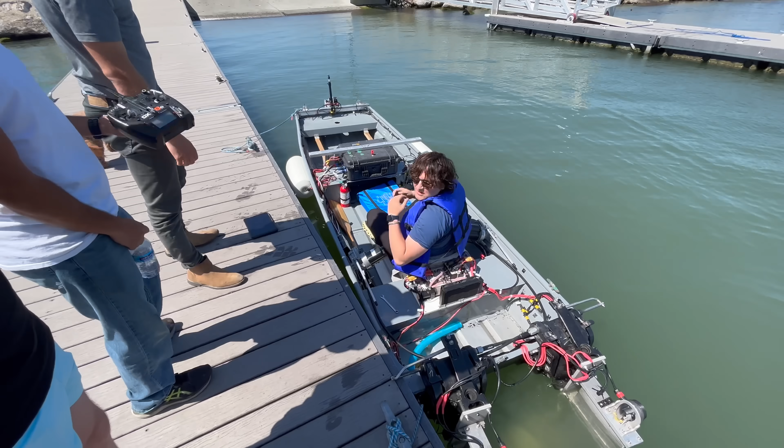Riding on the N30 was awesome, but I had even more fun riding on their little hydrofoil John boat. This thing served as a small-scale test platform that they used to develop their flight control system before moving up to the N30. It just so happened to use the exact same electric motors and ESCs that I used on my 13-foot Boston Whaler, so it was cool to see what kind of performance I could have gotten if my boat had hydrofoils, and weighed a lot less.

After riding this thing around, I knew I wanted to build a manned hydrofoil craft of my own. I didn't quite have room in my workshop for a John boat-sized build, so I decided to instead base mine off an 11-foot stand-up paddleboard. Eventually the design came to basically just be an extra large e-foil board, but one that you sit on instead of stand, because I want it to be self-stabilizing, not human stabilized like most other e-foil boards out there.

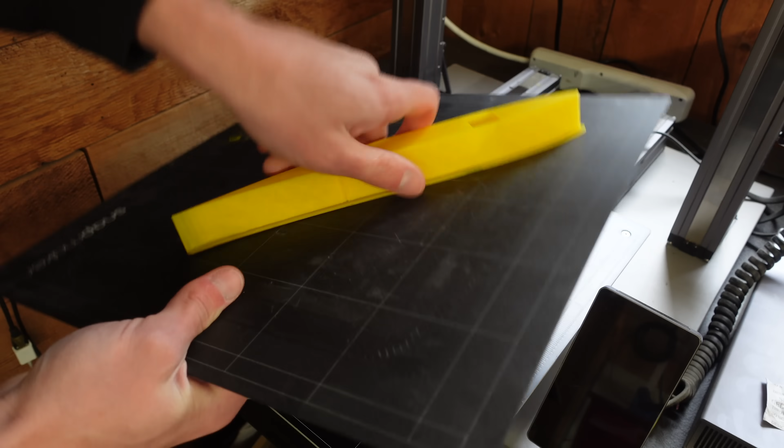For this I would use the exact same dRehmFlight code that I had used on my smaller scale test platform. I actually started this project several years ago by experimenting with 3D printed hinge designs in airfoil profiles. They turned out to work really well and were super easy to produce, so this is what made me end up wanting to 3D print the entire wing and horizontal stabilizer.

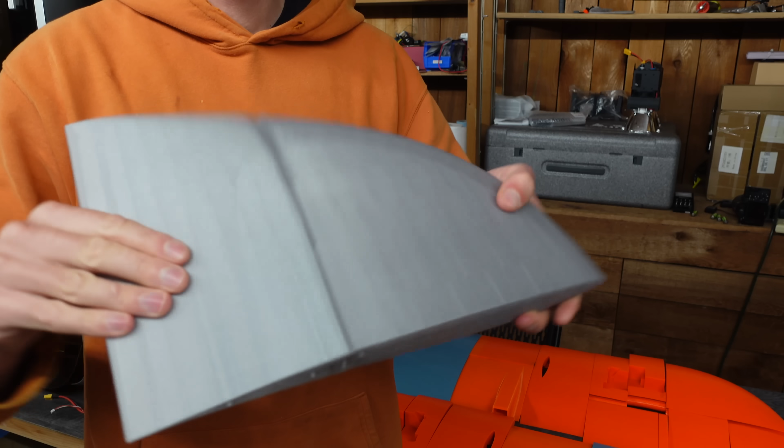3D printing also made it super easy to add all the little things, like servo mounting spots, wire channels, spar channels, attachment points for the tail booms, and so on.

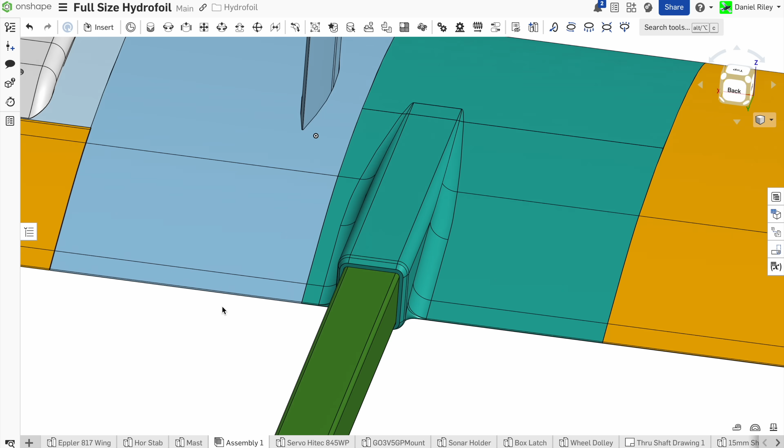The main foil has 2 ailerons, 2 big waterproof servos to control them, 2 extruded aluminum masts that connect to the paddleboard, and 2 attachment points for the tail booms, or fuselages as they're called in the foil world.

If we split it in half, we can see there are slots for an aluminum main spar and another aluminum alignment rod back here. In the back we have the horizontal stabilizer. It's held to the main wing with these 2 square 30mm carbon fiber booms. It has 2 elevator sections, each with its own servo.

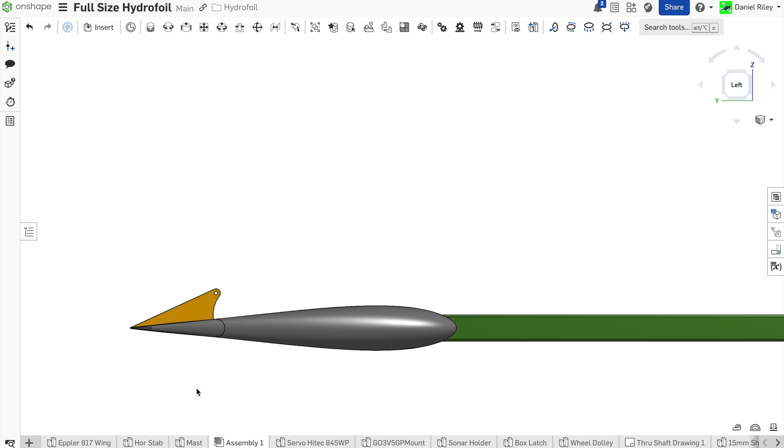The whole thing is a symmetrical airfoil that gets really fat around the big servos to keep it as streamlined as possible. The servos were too thick to entirely embed in the main wing as well, so to streamline those and reduce drag I just made separate servo covers for them.

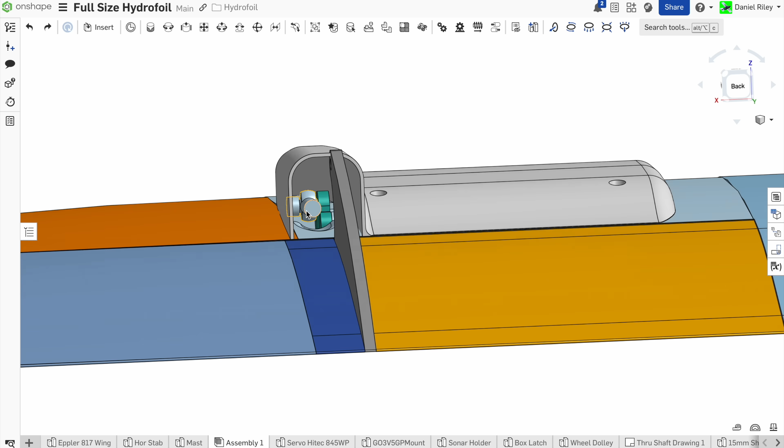The push rods and control horns are going to be similar to any old RC plane, just beefier. They stick out quite a bit and are definitely not the most hydrodynamic things in the world, but this is going to be a slow hydrofoil. Hopefully slow like my prototype was. Probably not that slow, but still hopefully pretty slow. I'm wanting it to be like the bush plane of the hydrofoil world.

At slow speeds, having draggy control horns isn't as much of an issue. If we were aiming for higher speeds, I would definitely want to find a way to make the control linkages more streamlined, but it shouldn't matter as much on this build.

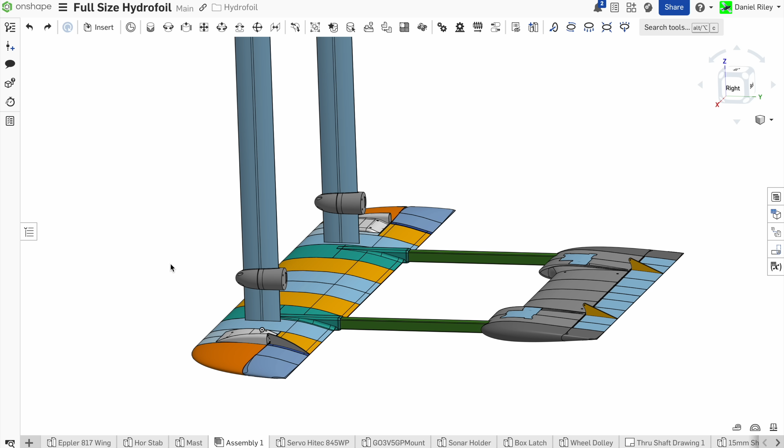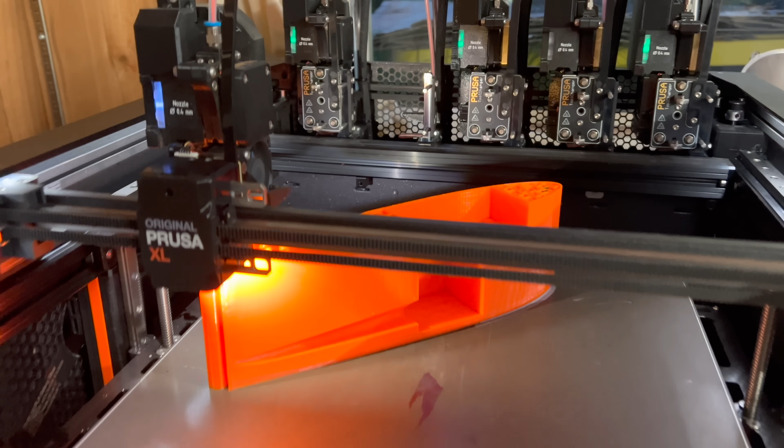If this wing was solely 3D printed, it would obviously just break since it'll be carrying probably over 200 pounds. So to help with the forces, I had the mast connected to some 1/4-inch aluminum plate that I had cut by PCBWay. The plate is welded to a square aluminum spar that runs through the length of each wing.

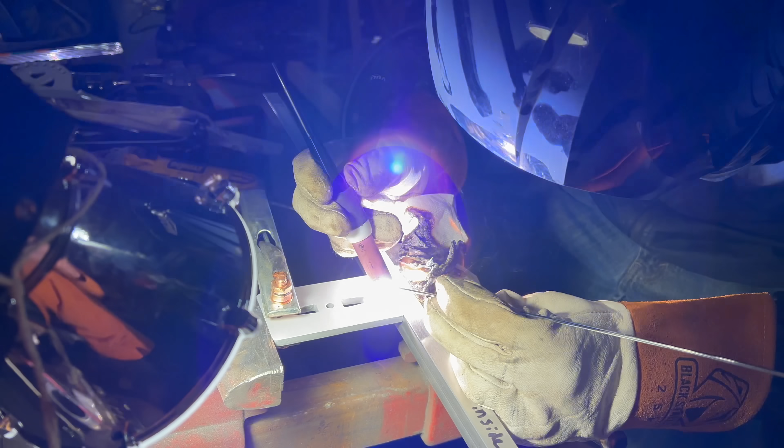If I were redoing this project, I would definitely change the way the spar and mast connector works, but for now this is the way it is. I got my roommate Ethan to TIG weld the spar to the mast connector plate. That worked pretty well, but I did have to hammer the spars back straight because they did warp quite a bit.

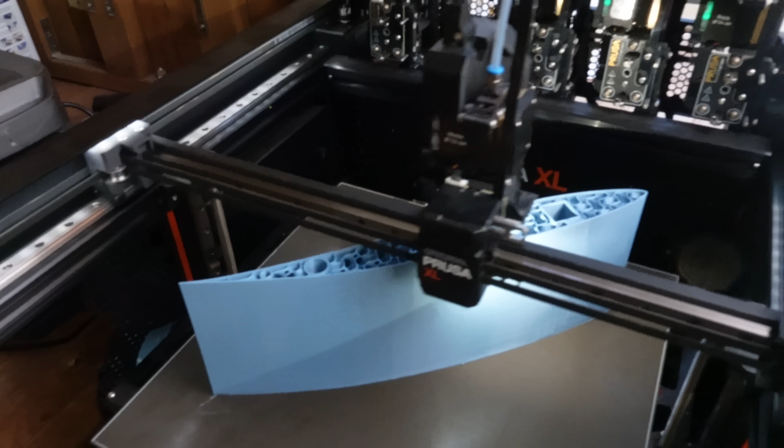Next up, it was time for a crap load of 3D printing. I printed pretty much this entire thing on the Prusa XL out of PETG. For a lot of the complex inner geometries, I used the multi-extruder capabilities to print PLA as the support material. It doesn't stick to PETG, so this makes removing the supports easy.

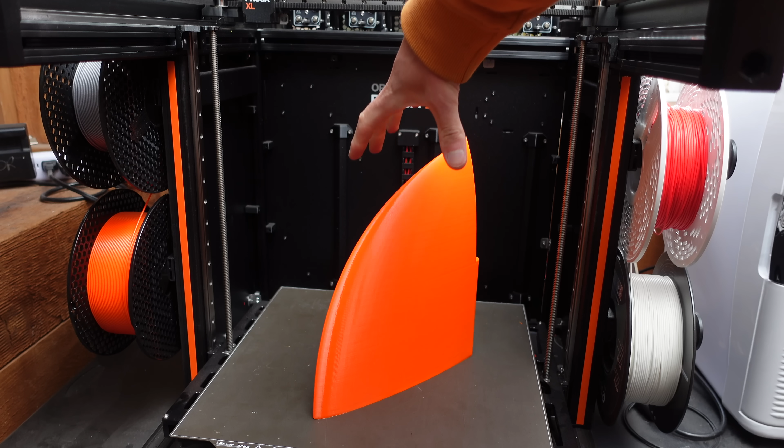Now most hydrofoils are made of carbon fiber because it's super stiff and can be made to have a super smooth surface finish. 3D prints are neither of those things, so my plan was to add a layer of fiberglass over the wing after it was all assembled. This would be fairly easy to do on the wing, but I obviously wouldn't be able to get fiberglass into the 3D printed hinges, so I was just going to leave that as raw plastic.

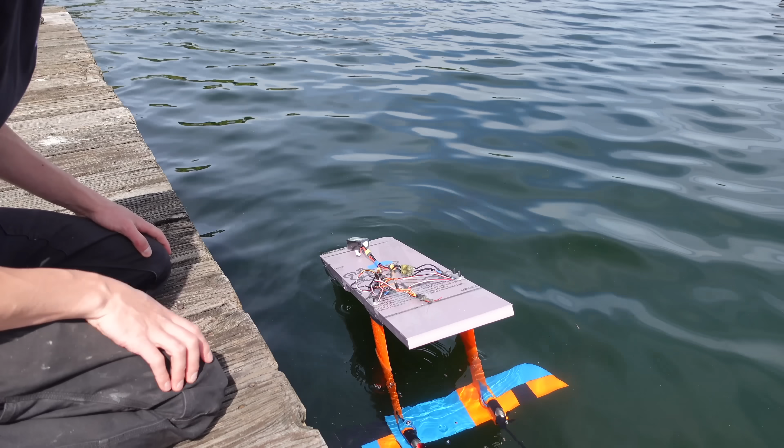I used a gyroid infill for the whole thing, and this was for a very specific reason. I initially wanted to keep each wing section airtight so that they would have some buoyancy. This would make the vessel pretty unstable while at a standstill, but while moving, the buoyancy in the foil would hopefully reduce the stall speed quite a bit. Having buoyancy in the foil was one of the reasons why this smaller version was able to go so slowly.

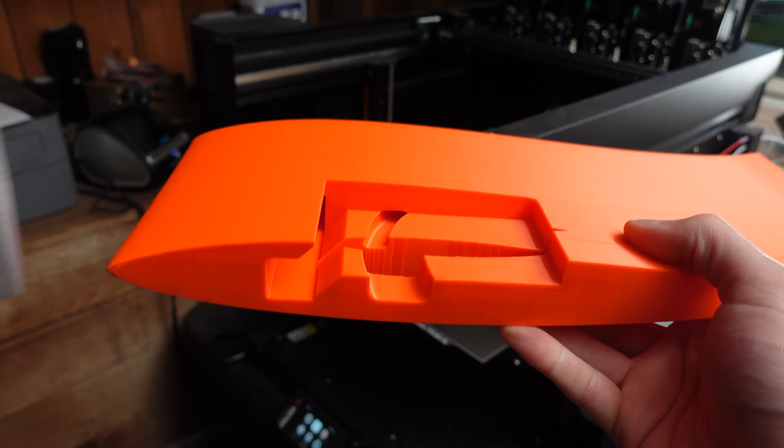So airtight prints was the hope, and I had pretty good luck achieving this on the Prusa XL in the past. But I also realized that most of the time FDM prints are not airtight. Fiberglassing over the surface would have fixed this, but I wasn't going to be able to fiberglass over the hinge portion, so they were still vulnerable to potentially leaking.

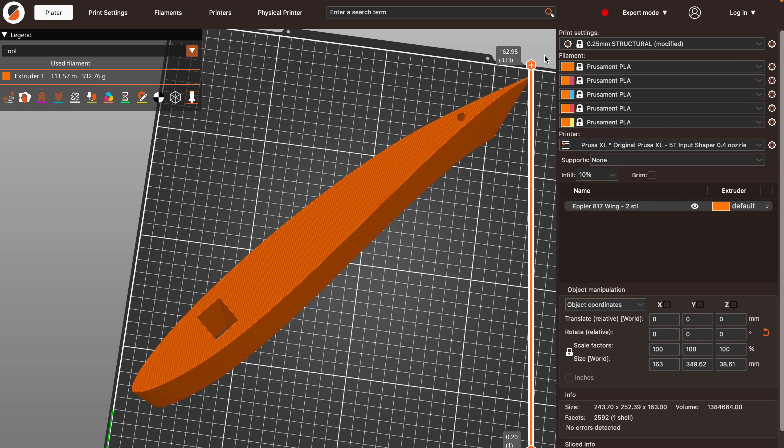If I were to have used one of the normal infill patterns, there would have been a good chance that individual cells filled up with water, and in this case it would be a total pain in the ass to get all the water out. I chose the gyroid infill because it makes the entire inside of the 3D print one continuous volume. This way, if a wing segment leaks, I can drill a little hole in it and the water will flow out when I bring the hydrofoil out of the lake.

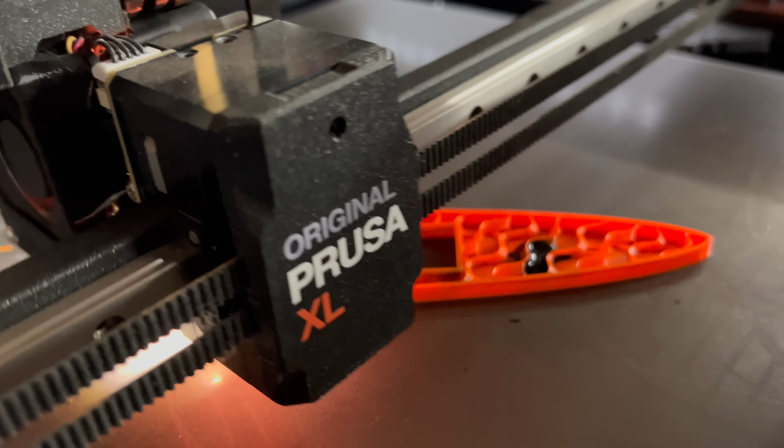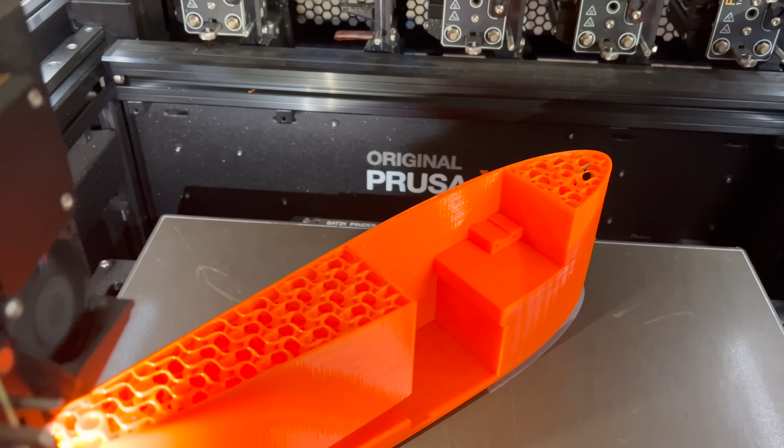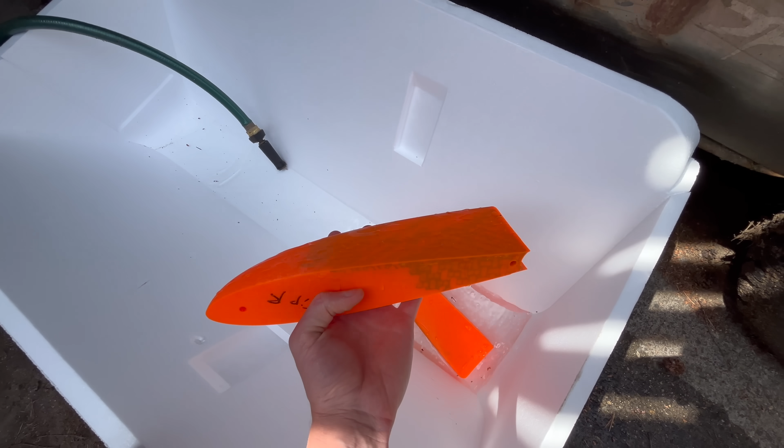I even decided it would be a good idea to put drops of black food coloring into the prints, so if the wing segments did fill up with water, I would more easily be able to tell, with the help of some backlight. This ended up being a huge mess, but for now the prints seem to be turning out pretty good. I did test some of the sections, and at first they seemed airtight, but after holding them underwater for several hours, the food coloring made it obvious that they did leak.

So this kind of ruined my dreams of a buoyant foil, but at least now it won't capsize when it's not moving. So after weeks of printing, I got all the pieces made, so it was almost time to start the assembly. But first, let's talk about the servos. These are the actuators that move the ailerons and elevator, so I can control the hydrofoil.

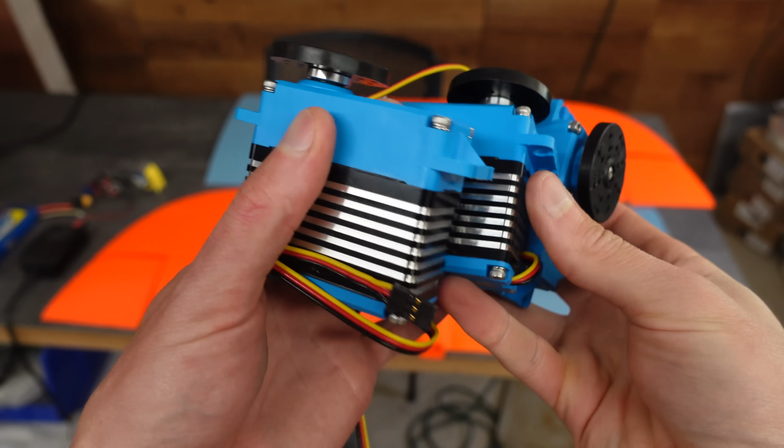I chose to use these giant high-tech D845WP servos. They have an IP67 rating, which means they are protected against short periods of immersion in water while under pressure between 15 centimeters and 1 meter. On the hydrofoils, they aren't going to be any deeper than a meter, but I was a bit sketched out by the short periods part.

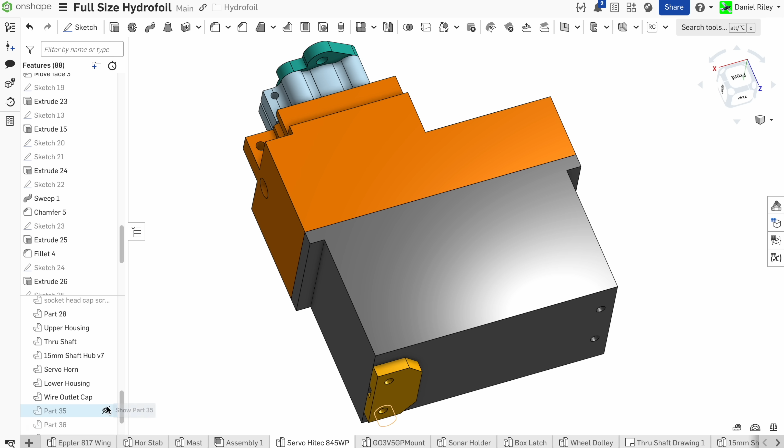So while they could have held up to water ingress on their own, I decided to play it safe and design an additional layer of protection. Here's what I came up with. There's an aluminum shaft that transfers the rotational movement from the servo spline out to the servo horn, and 2 resin-printed enclosure halves that seal the servo in. The aluminum shaft goes through the enclosure with a bearing here and 2 O-rings here to hopefully keep out water.

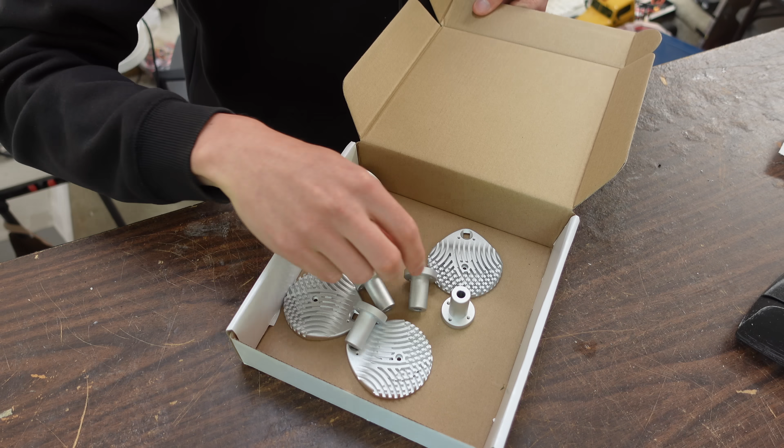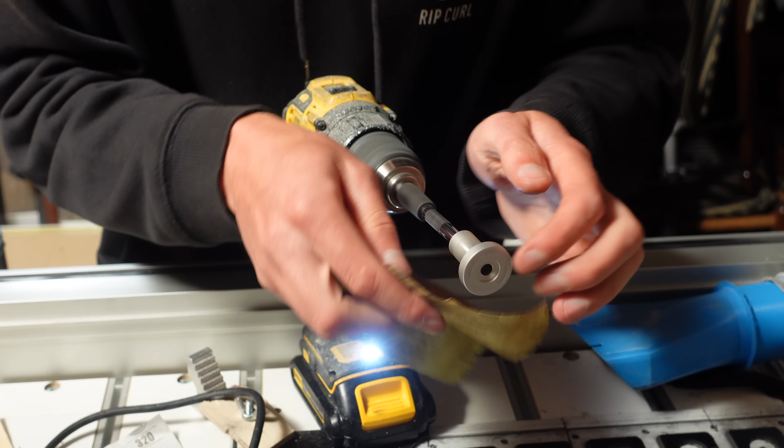I got the aluminum shafts CNC machined by PCBWay as well, and they came with a sandblasted surface finish. I wanted the area that goes through the O-rings to be smooth, so I threw them in my lathe and polished them with increasingly finer and finer sandpaper until they were, well, not perfect, but definitely smoother than before. Those got screwed onto the servo hubs, which then got attached to the splines. I SLA printed the housing shells out of clear resin on the Formlabs Form 4, and tapped some holes in them.

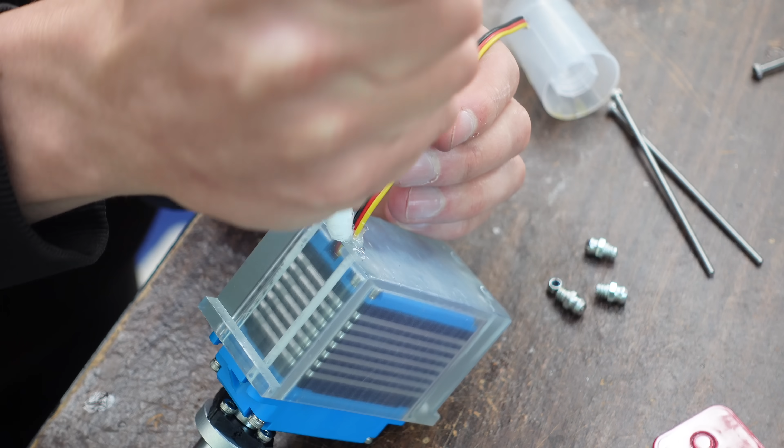You'll see why in a bit. The servos just fit right in there, and the wire pass-through hole gets silicone squirted around it, and then sandwiched in place by a little plate with a groove.

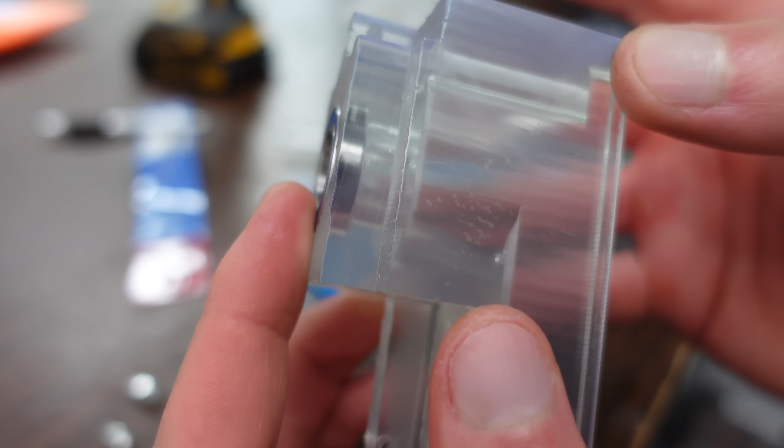Next, I lubed up the shaft with some silicone grease. I chose silicone grease so that it wouldn't degrade the O-rings or any of the other plastics. I popped a bearing into the upper part of the housing and put some grease behind that, and then put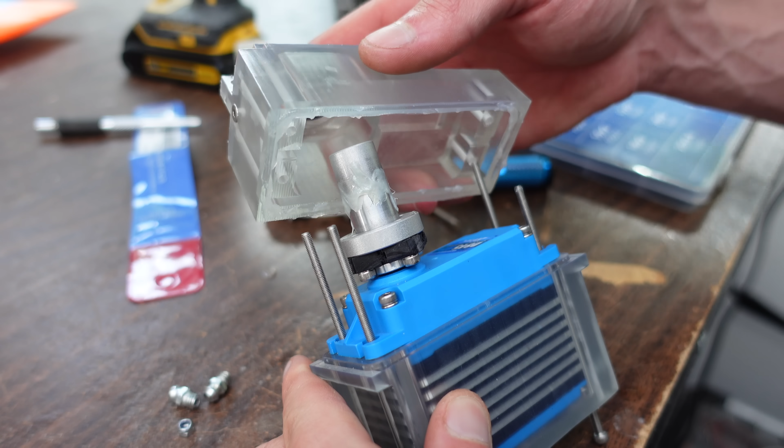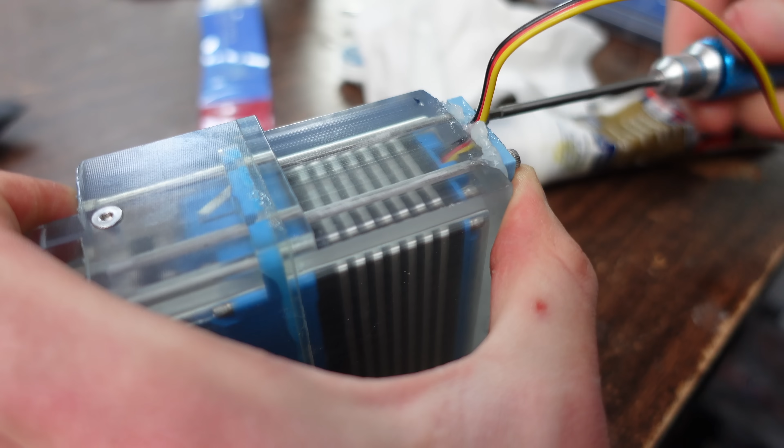in the 2 O-rings with as much grease as possible around them. To join the 2 housing halves, I siliconed around the rim, and then carefully slid those together while making sure the O-rings stayed in place. The 2 halves are secured together with long M3 screws, so I put some nuts in the nut-shaped slots and tightened down the screws. Earlier, I tapped a hole in the side for a vent with a flathead screw to close it.

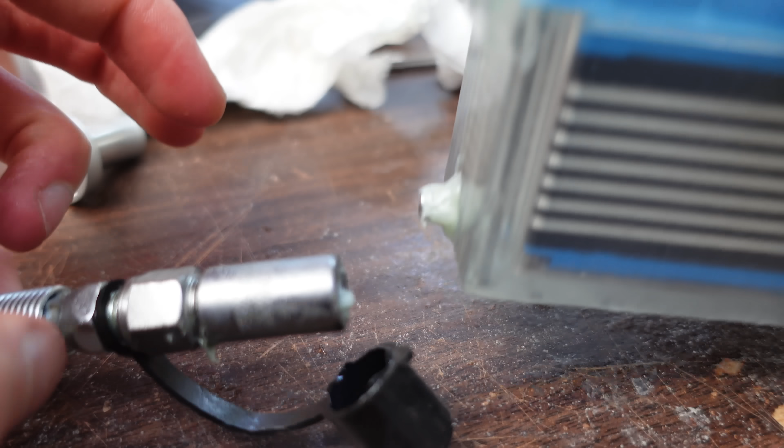For this next step, I had to remove the vent screw. Now here's the key to this design. I screwed a grease nipple into the servo housing and connected that to a grease gun. This allowed me to pump silicone grease into the gap between the servo and the housing, and hopefully form a fully watertight barrier around the servo.

There was a delicate balance between the pressure needed to fill all the cavities and the pressure needed to just blow up the housing. So I just covered the vent hole with my finger and gave it a few extra pumps to hopefully allow the grease to fill all the voids without cracking the housing.

Oh yeah, it's pressurized, baby. Oh, I can see the O-rings getting greased. Ready, set, fire in the hole. Wow, it really did fill in all the holes.

Then I could remove the grease gun from the grease nipple and put the vent screw back in to hopefully lock in the grease for good.

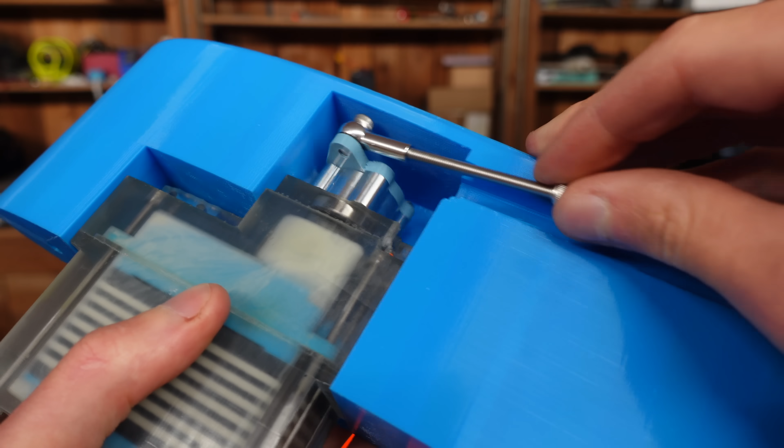During the design, I tested a lot of different sizes of control horns to perfectly match the full range of motion of the servo with the full range of motion of the control surface. This is really important because we want to get as much torque as possible into the control surface. But more importantly, if the servo were to have enough range of motion to max out the control surface throw, then it would probably just break everything.

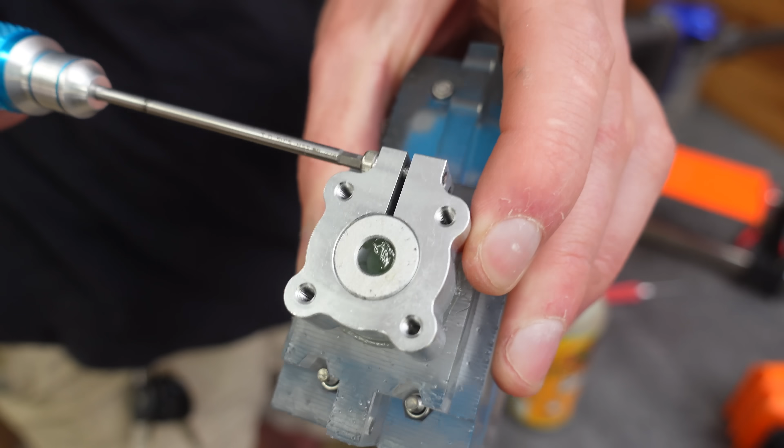So I was careful to design it so that nothing would max out, even throughout the full 1000 to 2000 microsecond range of the PWM signal. I'm using these shaft collar flange hub things that are left over from the Snowcat project. They hold the servo horn onto the servo shaft. The servo horn is this short stubby little carbon piece that I cut on the CNC router.

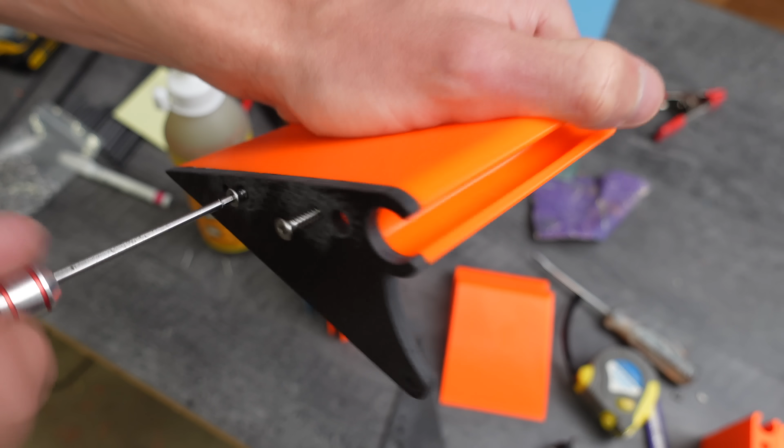Once I figured out the right geometry, I CNC cut the control horns out of 4mm carbon fiber plate and screwed those onto one of the elevator sections. All the elevator sections slide onto carbon fiber tubes with Gorilla Glue in between.

The sections of the main wing fit together in the same way. They all just slide onto the spar and are held together with Gorilla Glue. I used small carbon tubes as alignment pins to keep the sections perfectly aligned as the glue dried.

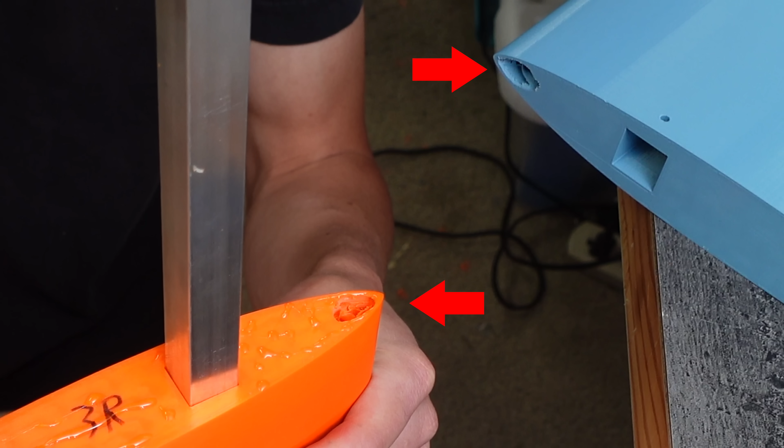After I came to realize that the 3D printed wing segments were not going to be watertight, I decided to make it easier for water to flow through the entire wing so that it would drain more quickly when I pull it out of the lake. To do this, I cut away the outer shell near the leading edge of each section. This way the infill of each section is connected and water can drain through the entire thing.

Here's some of the horizontal stabilizer sections going together. Same as everything else, those just slot onto 6mm carbon alignment rods. And then once the Gorilla Glue had cured and foamed out, I shaved off the excess with a razor.

The elevator then just slides onto the horizontal stabilizer. It's super simple, and the hinge is very robust and low profile. I was really happy about this part of the design.

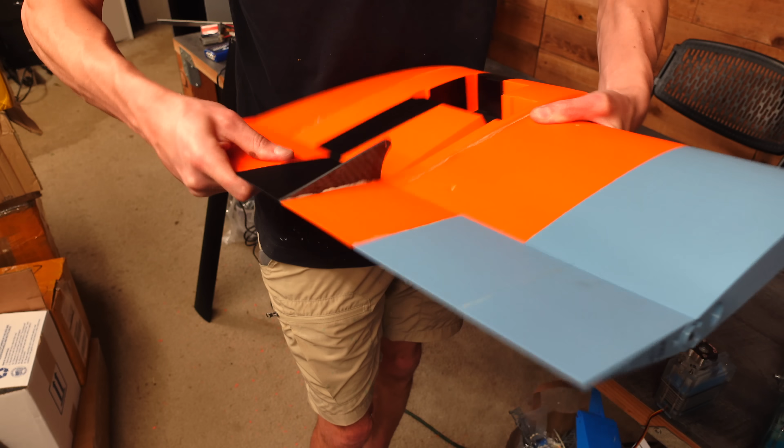Next it was time to install the servos and control linkages. I'm using some nice ball joints with M5 threaded rod. The ball joints just screw onto the servo horn with a nut on the back.

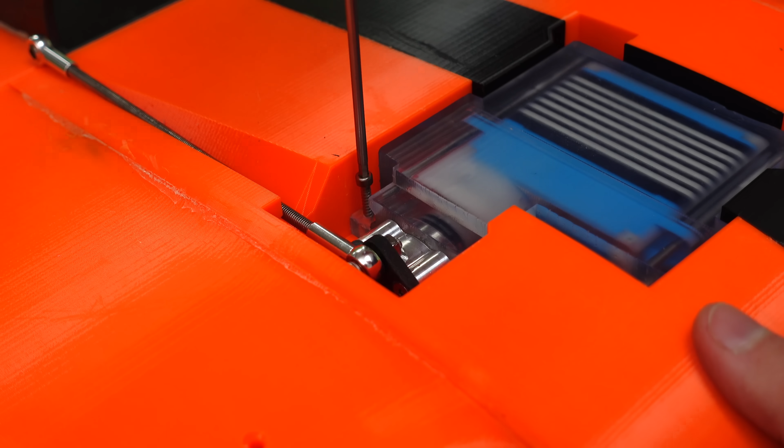The servo wires were going to have to travel a long ways, so I soldered on some thicker gauge extensions and pulled those through. The servos themselves just screw into place with thread-forming screws on each side. The control rod then screws onto the control horn, and with that the linkage is complete. Here it is wiggling.

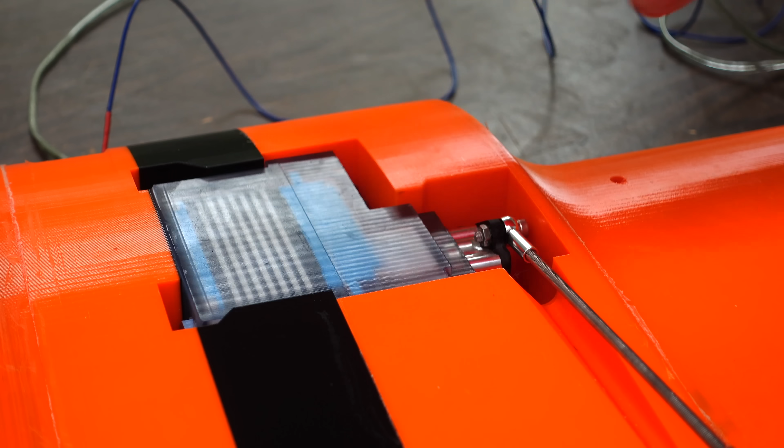And then I installed this cover over the servo to make it more streamlined.

Next it was time to mount the aileron servos in the main wing. First I had to route the wires through, and then the servos just pop into place, and are secured with thread-forming screws. The pushrod came after that, same as before. And we can see it wiggles very well, no problems there.

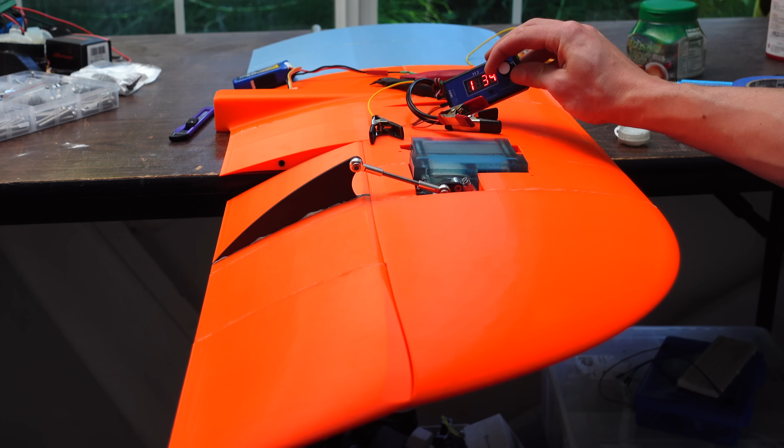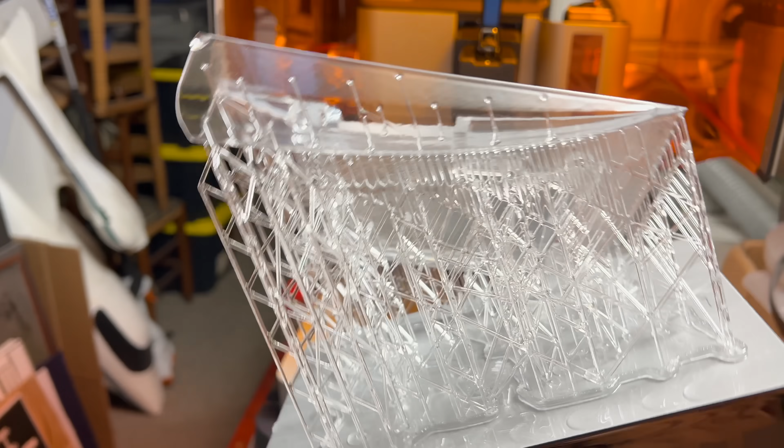These servo covers attached over the servos to make them more hydrodynamic. It was SLA printed on the Formlabs Form 4 that came out a few months ago. This thing prints super fast, so it's great for big parts like this. Finally, this hydrofoil is starting to take shape. Ooh wee, look at that.

This thing is huge. Now let's redirect our attention to the board. This thing is 11 feet long, but it really doesn't need to be that long, so I decided to cut the back off. This would make transportation a bit easier and reduce the weight a little bit, but other than that, cutting it was probably not entirely necessary.

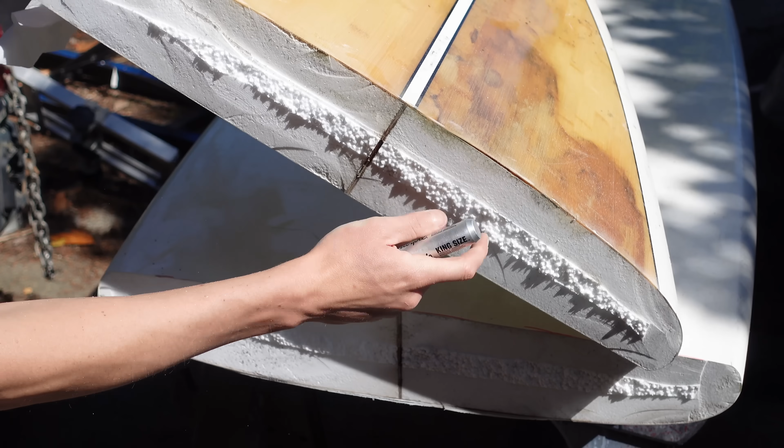The wood layer in between the foam and epoxy skin was soggy and delaminating, so this board was a great candidate to get cut up. To hopefully fix the delamination, I injected Gorilla Glue in there.

My plan was to cap the back with some fiberglass, so the first step was to fair the surface a bit and cover up some of the holes and valleys with fairing compound. Then I gave the edge a slight fillet so that the fiberglass cloth would more easily adhere to the contour. And the fiberglass cloth is exactly what came next. I mostly used 7-ounce cloth, but I used a few layers of 2-ounce on the edges since it conforms so much more easily. Now I need to make the part that attaches the board to the foil masts.

I'm using a section of this 2x12 piece of wood, and I marked out all the drill spots with a mostly 2D, 3D printed stencil. These are the holes that the mast base plates will screw onto. And then I also cut some notches to reduce weight, since this was quite a thick and heavy chunk of wood. Probably way overkill, but whatever. That whole thing got a quick sanding to smooth out the sharp edges.

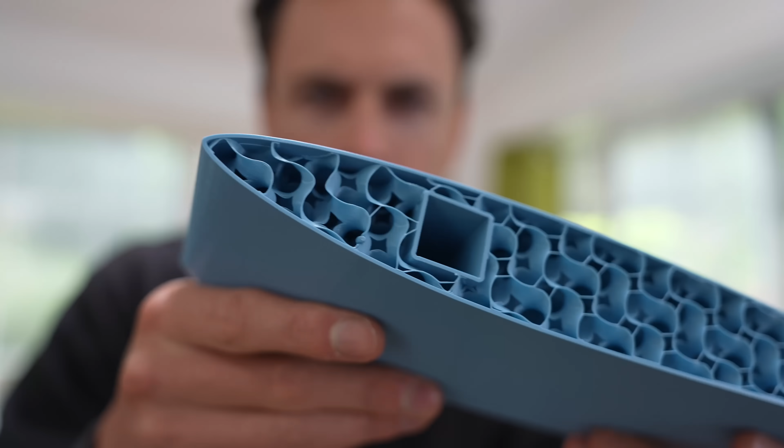The thought of building a giant hydrofoil from scratch like this probably seems like a really daunting task for most people, but for me it totally seemed doable, and that's only because I started small and slowly worked my way up to bigger and bigger projects throughout the years. For me, this journey started early, and I'm really grateful for that, because I feel like starting young really helps you build an intuition for how things work in the physical world. One of the best things you can do for kids is to get them to start building things at an early age, and that's where KiwiCo can help.

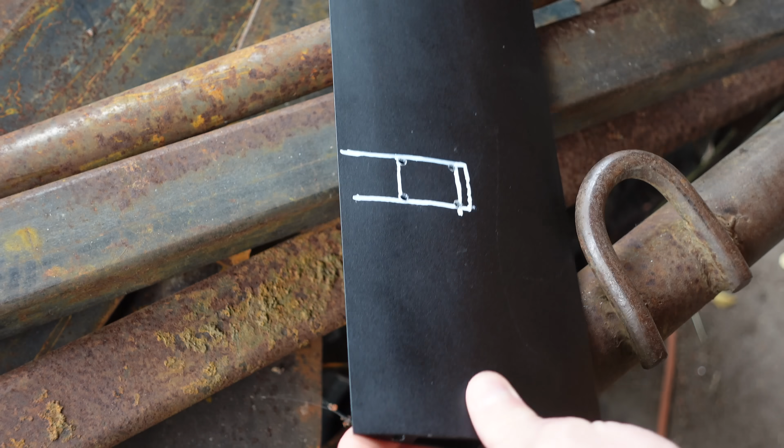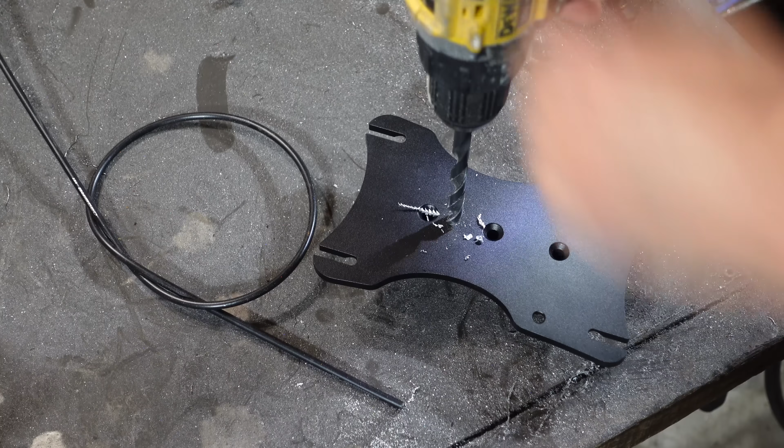Now let's get back to building the hydrofoil. Next we'll direct our attention to the masts. I had to cut some holes in the side for the phase wires to fit through. Here are the mounting plates that hold the masts onto the board. These were clearly not made for e-foils because there were no holes for the phase wires, so I had to make them myself. These are the times when I wish I had a mill. This was pretty painful, but eventually I got some holes big enough for all the wires.

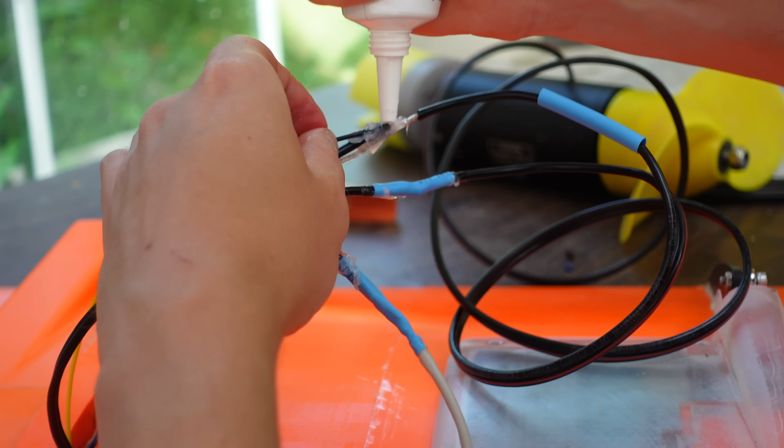Before mounting the masts to the wing, I had to do some soldering. This was so that the aileron and elevator servos could share common power wires. Fewer wires make it easier to route them all through the masts. This is where I really needed that heat shrink with hot glue built in, but I didn't have it, so I just tried to get as much silicone as possible under the heat shrink. I'm still to this day not entirely sure if this method worked very well.

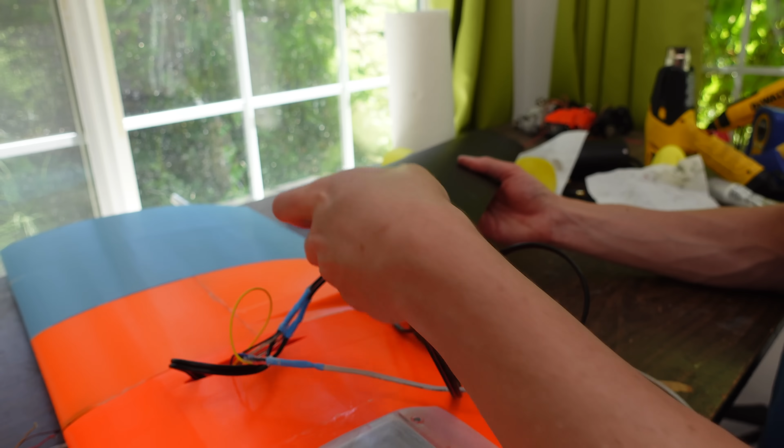Those wires got routed up through the masts, and then the masts got glued onto the wing. Don't worry, it also got screwed into the aluminum base plate in the bottom, but I did later realize I shouldn't have made the base plates completely stick through the bottom of the wing like this, so that's why I'm also gluing the masts in place. Then I glued a cover over that. I also made a nice fillet with fairing compound around the masts and hoped that it would help share some of the load and stiffen things up.

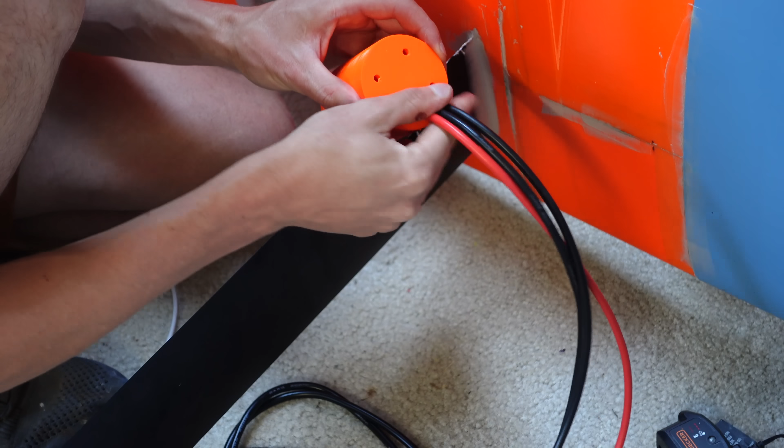Now it's motor mount time. The orange is PETG and the yellow is TPU. The yellow part is what will hug the mast, so I was hoping it would provide a bit of vibration damping. The phase wires go through the rear mount part, then through the mast, and come out the other side. The motor mount then just slots over the mast, and the front part goes on with 4 long-ass screws that go all the way into the motor.

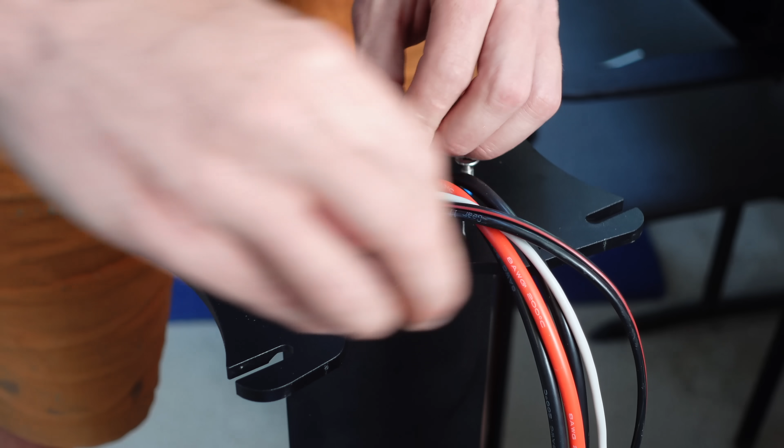The wires that go through the mast then go through the mast mount, as with the servo wires. The mast mounts then get screwed onto the mast. I'm using the same FDM printed propellers that I initially made for my electric Boston whaler. So here's where we are so far. Looking good. Next, it's time for the tail booms.

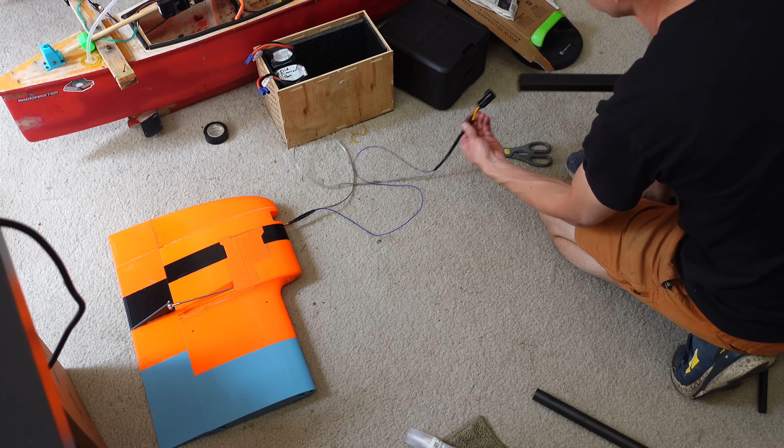I'm using these waterproof connectors to make the horizontal stabilizer removable for transportation. I also soldered matching connectors onto the main wing side and routed those wires through. That was before the mast had been attached.

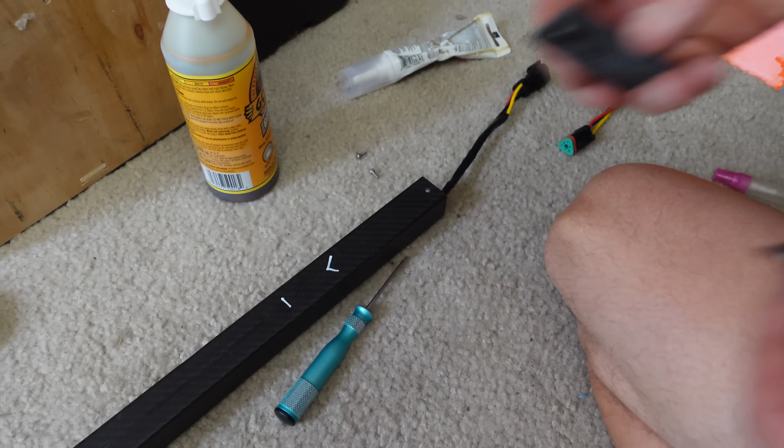To fasten the booms to the wing, I'm going to glue in these little pieces of carbon plate with M3 press nuts in them. Those just got glued in right under this hole I drilled. That press nut is in there so that a screw can go through this hole and hold on to this boom. Now it's back to that big piece of wood.

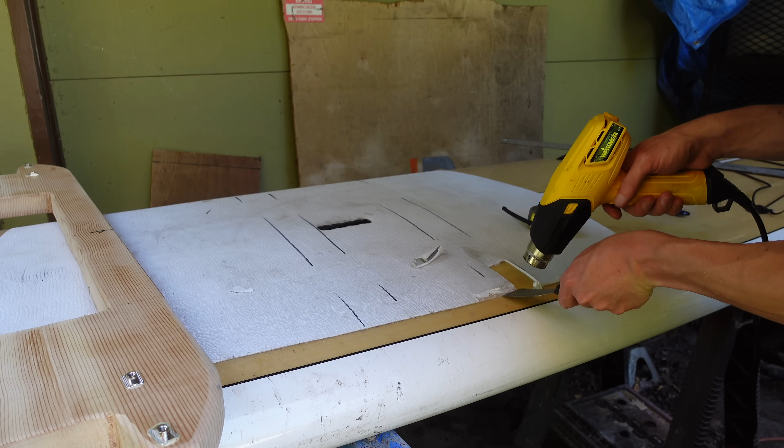I glued some T-slot nuts into it just because they're the only nuts I had that were gluable. Those are for the bolts that hold the masts onto the wood. Now it's time to put the wood onto the board. Step 1 was to remove the foam, and man, what a pain that ended up being. This was some tough foam.

The paddleboard had a curved top, so to give the big piece of wood a flatter surface to sit on, I glued some smaller pieces of wood to the rails. Once the glue dried, I sanded the top down so that it was flat. Same with these other pieces of wood I glued on there. I kept sanding and checking over and over again until the big piece of wood laid flat. Then finally I glued the big wood to the little wood.

But don't worry, this glue isn't the only thing that will hold me up. Here you can see how I used some Depron foam sheet to build a little wall that lies tangent to the edge of the board. Then I laid some carbon fiber tow down that wraps around the big wood and drapes over the edge of the board. My entire body weight and the weight of the board and the battery is going to be hanging underneath this wood, and these carbon fiber strands are going to be what's supporting the majority of the weight.

I also laid 7-ounce fiberglass cloth over pretty much everywhere else on the joint between the wood and the board. After sanding the edges of the tow down smooth, I added a few layers of 2-ounce glass to that whole area. This will just help keep the tow locked down and make the whole area smoother.

Now to put my fabrication skills to the test. Will the wood just rip off the board when I stand on it? Nope, seems like it's plenty strong. It felt super solid. Then I painted the wood and fiberglass white to protect the epoxy from UV rays.

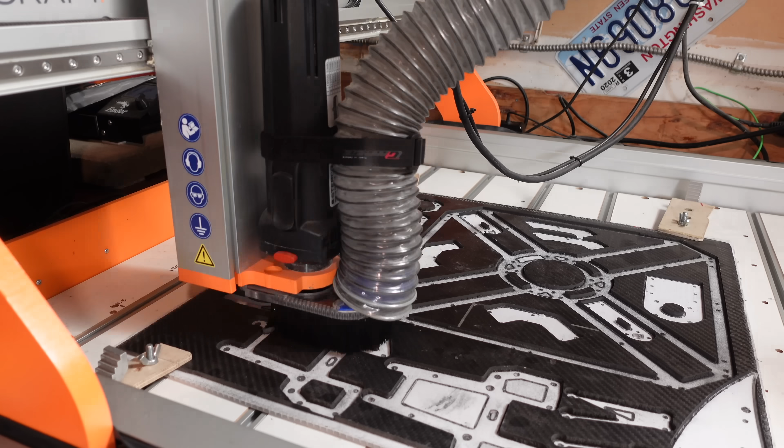Now back to the main wing. I used my CNC router to cut 2 strips of 4mm carbon fiber plate. These slot into the main spar and connect the 2 wing halves together. There's also an aluminum rod at the back that helps with alignment.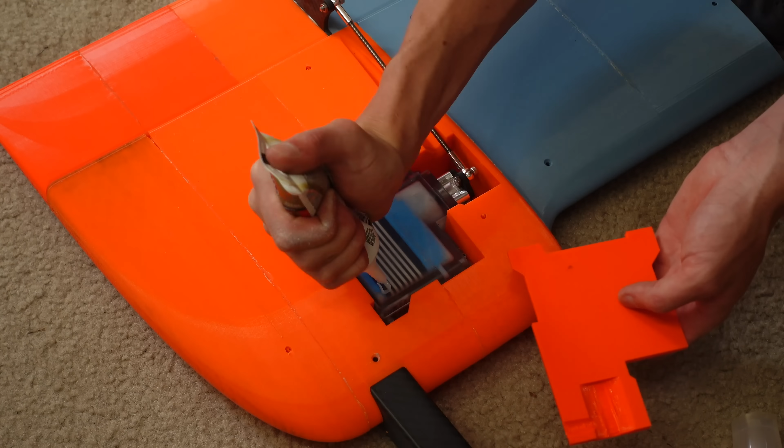Here's a random elevator servo cover getting glued onto the horizontal stabilizer. Remember how I said I was going to fiberglass over the entire wing? Yeah, well, I ended up just kind of shifting it into quick and dirty mode and skipping that part.

However, there was one area that definitely needed some reinforcement, and that is the area between where the tail booms connect into the wing and the masts. There's no structural frame that connects the tail boom directly to the mast. They're both just connected with 3D printed parts that are glued together.

So to prevent this area from just ripping apart, I'm laying some fiberglass down. This will hopefully create an exoskeleton that locks the plastic together. I also wrapped some carbon fiber tow around the edges, so that should add a good bit of strength.

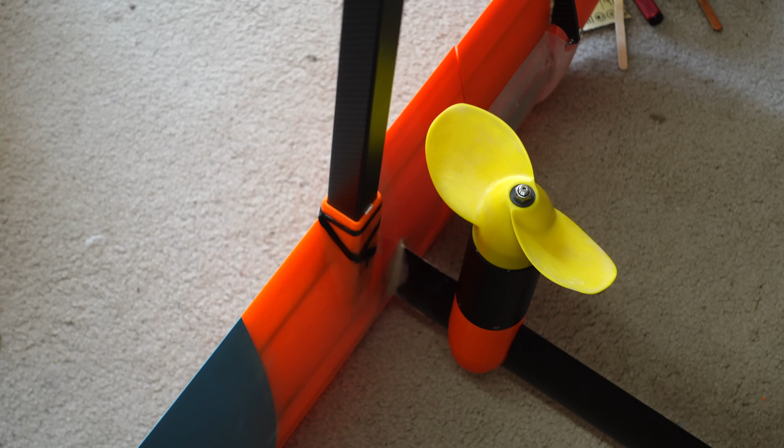Despite this, I was still quite skeptical of whether or not it would hold up. That's some flex there for sure. God damn, this thing is pretty janky.

Next up, it was time for the battery box. I wanted to make it really big so that it would fit a 100 amp hour, 24 volt lithium iron phosphate battery. It's pretty simple, just a box made out of 1-inch XPS insulation foam. And that whole thing just got glued onto the back of the paddleboard.

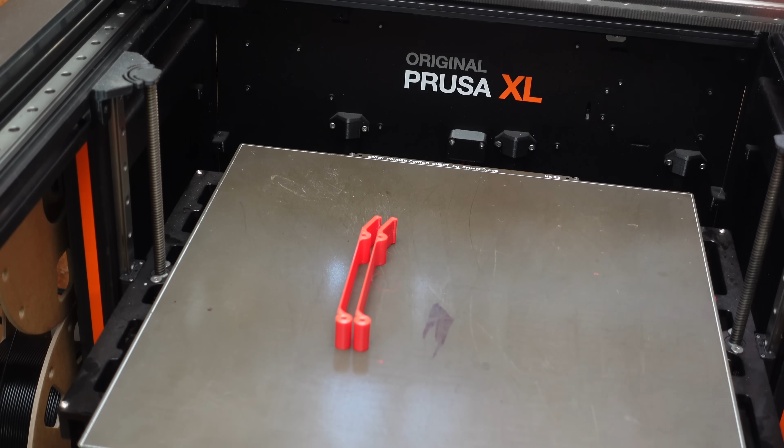I made some nice straps out of this super flexible Fiberflex 40D filament. Those get paired with some other parts to make these simple latches that keep the box lid closed.

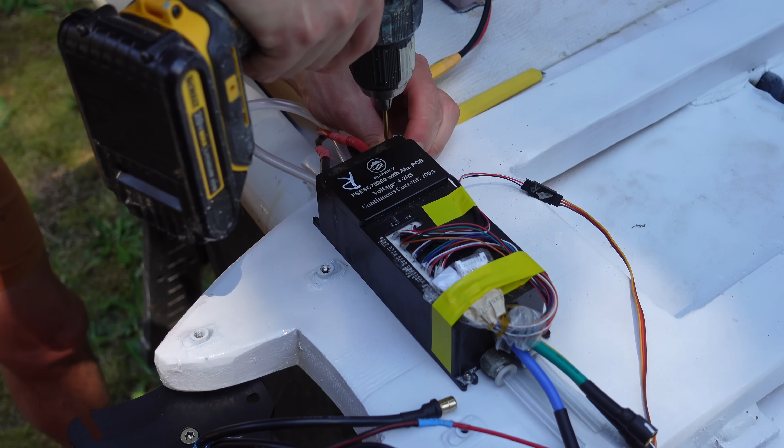The motors and ESCs on this hydrofoil are the exact same ones that used to be on my electric Boston Whaler. They're Vesc 75200 ESCs and FlipSky 65121 motors. The flight controller and radio literally came straight off the small-scale test platform.

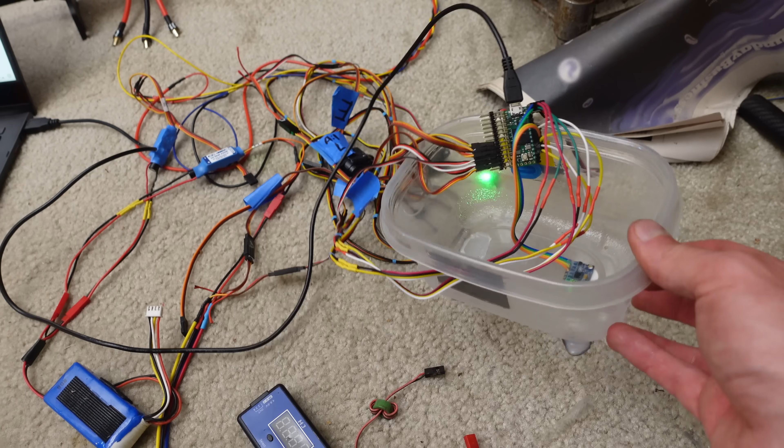After setting up all the actuators and servo endpoints in dRehmFlight, I was able to wiggle the control surfaces. Since the elevator was split anyways, I decided to just make it elevons instead of elevator only. Here you can see that when I wiggle the IMU around, the control surfaces are moving to try and stabilize the vehicle. Once this whole thing is assembled, it's going to be really big and heavy.

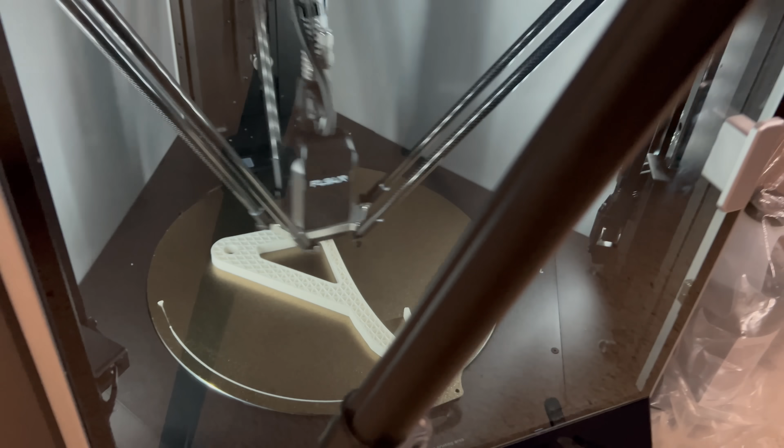Definitely too much for one person to lift, so I designed some removable wheels that will attach under each wing. I'm printing these things on the new FLSUN S1. The main selling point of this printer is that it's super fast. And by golly, they're not kidding.

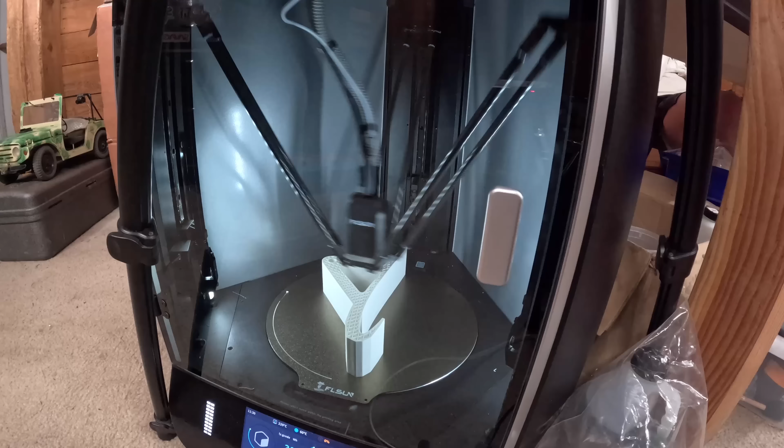This thing was a giant part, printed with relatively dense infill and thicker outer walls. Despite this, it only took about 5 hours. This would have taken like 16 hours or more on any of my other printers.

Some lawnmower wheels just bolt onto the 3D printed parts, and they just hug the bottom surface of the wing and leading edge. That allows you to lift the nose of the paddleboard and move the whole thing around really easily. At this point, I had finished mounting all the electronics to the board and set up differential thrust for yaw control. That pretty much concludes the majority of the build.

There's a few more things we'll add later, like the sonar sensors and a seat, but for now it's ready for a preliminary test. I broke it all down, put it in the back of the truck, and headed to the lake. This first test will be with IMU-based attitude stabilization only, no active height control.